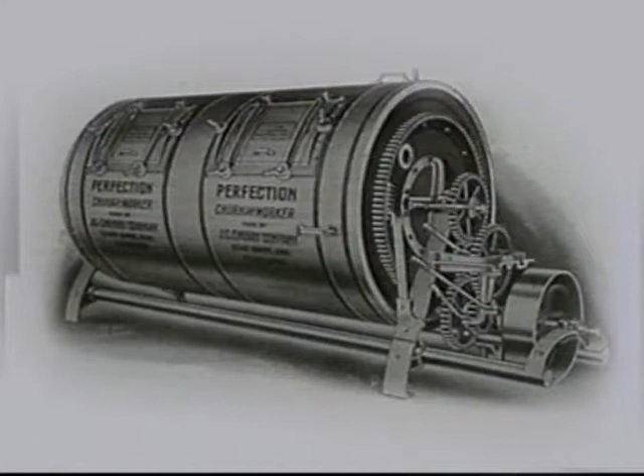Milk, homogenized, pasteurized, packaged, refrigerated, and wholesome. But back in the 1800s, even with ingenious inventions automating the dairy industry, maze-like piping and hard-to-reach surfaces made cleaning and sanitizing difficult. In the early 1900s, dairy products were transported slowly and left outside. There was little protection from contamination and spoilage, especially in summer months when all food spoiled quickly.

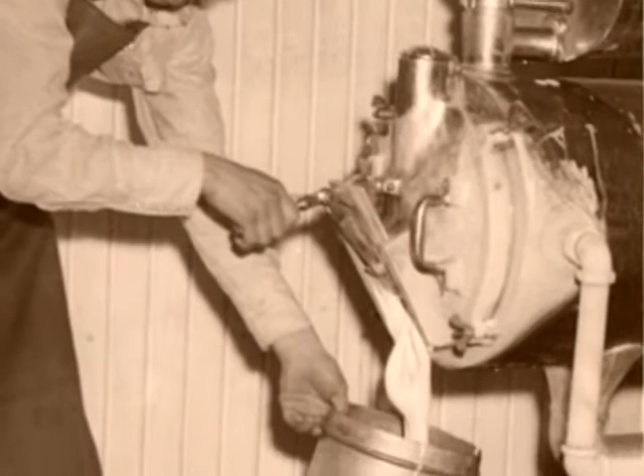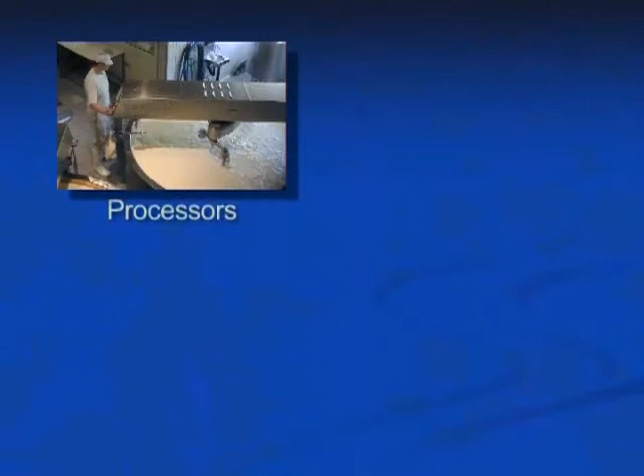The quality of life in America needed more than ingenious inventions, and once again, the dairy industry took the lead with innovations in sanitation. During the 1920s, the forerunners of three present-day associations started to develop more stringent and uniform standards for dairy processing equipment. The discussion included processors, sanitarians, and equipment manufacturers. Together, they published the first industry equipment standards, which became known as the 3A Sanitary Standards, named for the three groups that had combined their efforts to improve equipment design and sanitation.

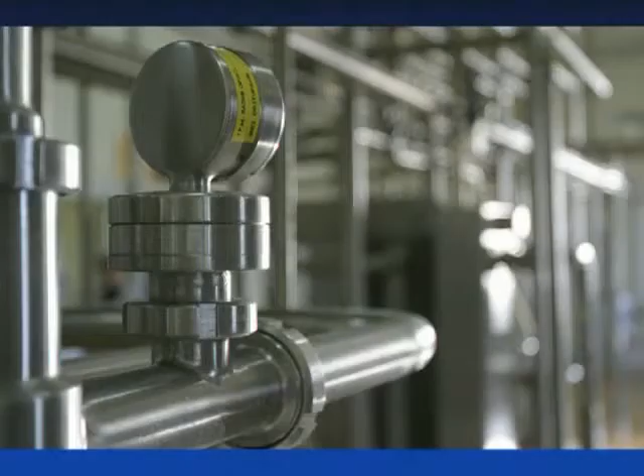In 1944, a dairy industry committee was formed, and the U.S. Public Health Service offered full cooperation with the 3A program. This marked the beginning of a program to provide uniform equipment standards for the protection of public health. And in 1954, the first processing equipment bearing the new 3A symbol was revealed at a dairy industry exhibition. Now, processing equipment could be shown to meet certain material, design, and fabrication standards for cleanability and inspection. The chances of milk being good for you were better than they'd ever been before.

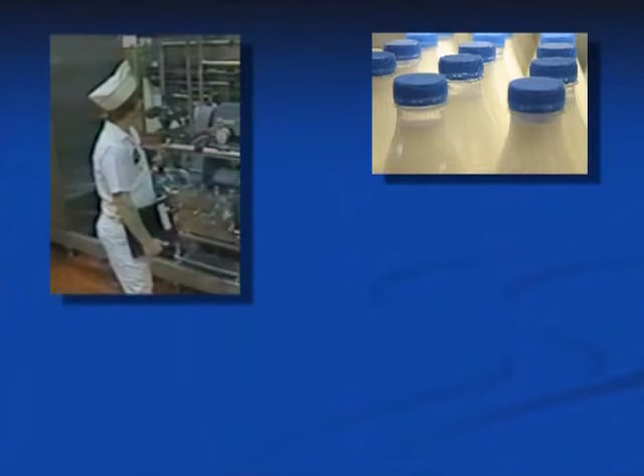In 2002, 3A Sanitary Standards Incorporated was organized. 3ASSI is a not-for-profit corporation governed by representatives of the stakeholder groups: processors of dairy food products, federal, state, local, and industry sanitarians, academic institutions, and equipment manufacturers. 3ASSI today is responsible for overseeing the growing inventory of standards, the 3A symbol licensing program, and much more.

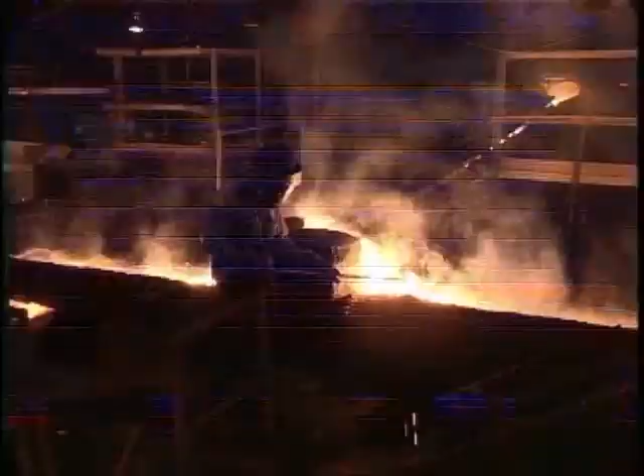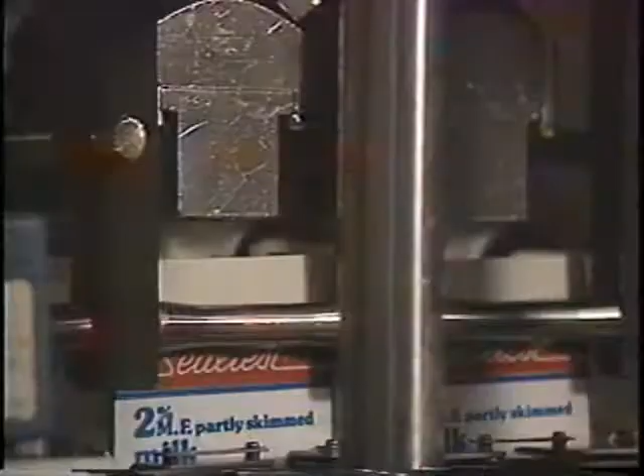Today, there are approximately 80 3A sanitary standards and accepted practices. More than 360 companies from across the U.S. and 22 countries around the world hold authorizations to display the 3A symbol on various types of processing equipment. The 3A sanitary standards combine material, design, and fabrication criteria to assure the cleanability of dairy equipment. The goal is to protect consumable products from contamination and to ensure that all product contact surfaces can be properly cleaned and sanitized.

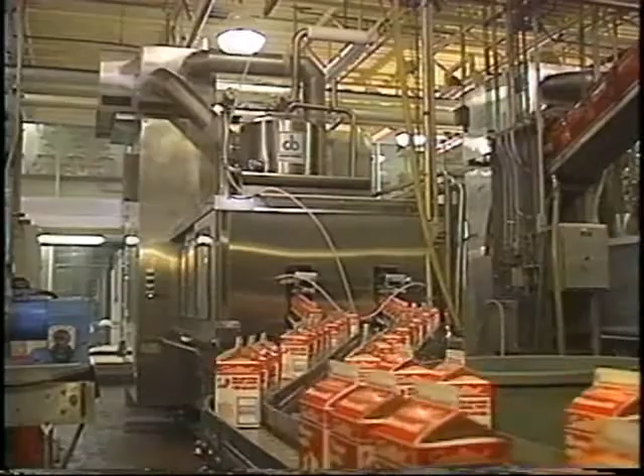Before 3A SSI authorizes display of the 3A symbol, manufacturers must conform to established criteria in the 3A sanitary standard for the equipment. First, equipment must be manufactured from specified corrosion-resistant, non-toxic, non-absorbent materials that can be maintained under its intended use. Contact surfaces must be smooth, non-porous, and free of flaws that could harbor residue and bacteria.

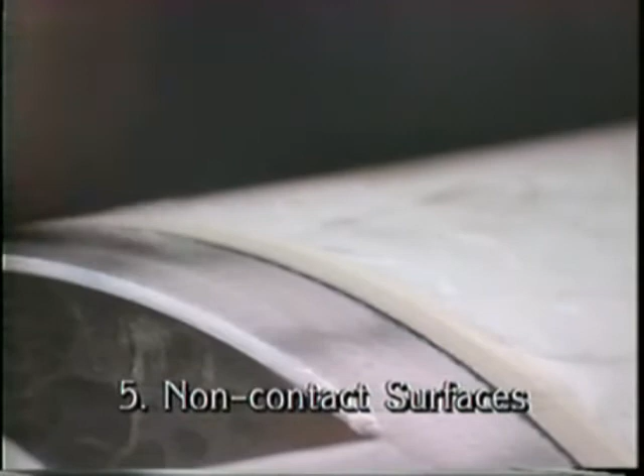Equipment must be designed to be effectively cleaned and sanitized, as well as be accessible for inspection. Equipment must also be designed to protect its contents from external contamination, and all non-product contact surfaces around the equipment must be cleanable. Together, the application of these equipment standards reflects the goal of the 3A Sanitary Standards Program: the protection of public health.

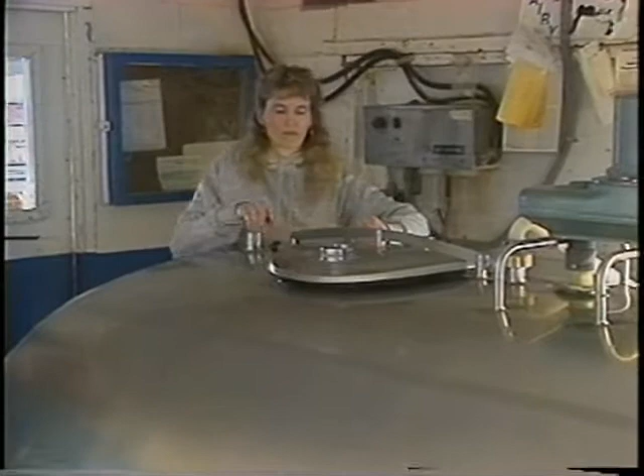On the dairy farm where milk is held in refrigerated storage tanks, the 3A symbol shows that the material and cleanability standards were built into the equipment at the time of its manufacture. On its way to the dairy, milk is transported by stainless steel tanker trucks that meet the same strict standards for materials and cleanability. Once inside the processing plant, milk products flow through equipment that has met yet another set of stringent criteria.

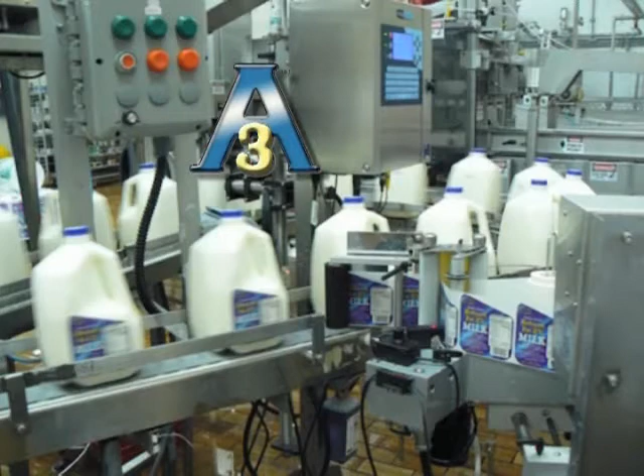These 3A sanitary standards, which apply from the farm to packaging, are formulated and developed through the diligent volunteer collaboration of equipment manufacturers, processors, sanitarians, and regulatory authorities. The 3A symbol assures that the processing equipment has been designed and built to exacting sanitary standards and properly verified. When consumers reach into the dairy case in the supermarket or the refrigerator at home, they have more assurance than ever before that yes, dairy foods are wholesome.

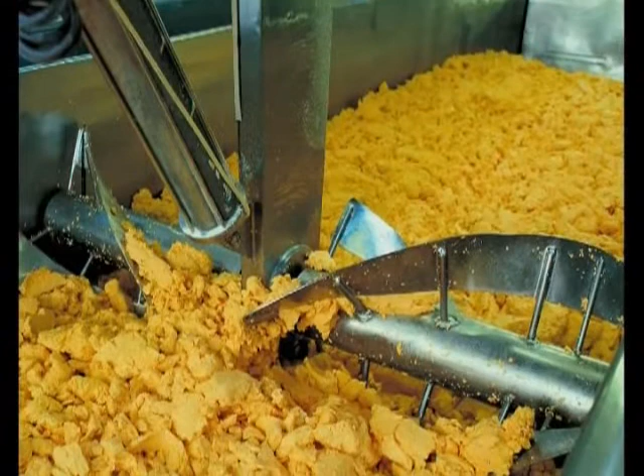The 3A symbol on a piece of processing equipment is far more than just another logo. Over decades of use in the marketplace for food processing equipment, the 3A symbol has earned special stature and recognition, even more so today with independent verification of equipment required for use of the mark.

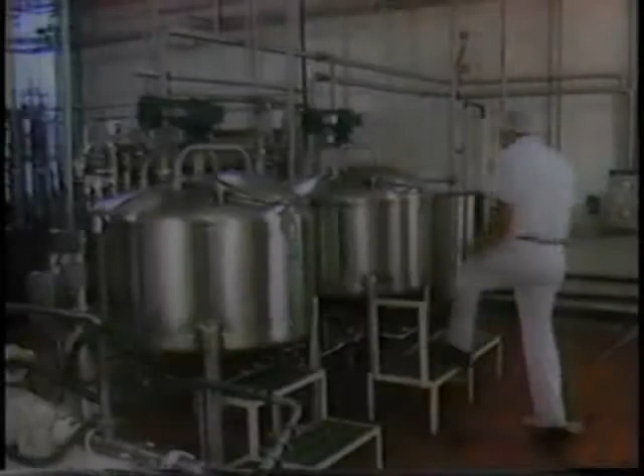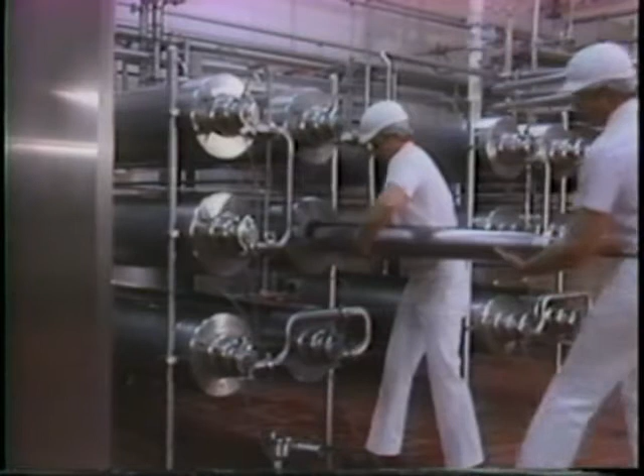Users of dairy processing equipment trust the 3A symbol because it shows that the equipment meets sanitary design criteria approved by regulatory sanitarians and others. They know that the equipment they specify or purchase with the 3A symbol will be easier to clean and maintain, and that the inspection will go more smoothly because equipment conforms to standards that sanitarians help formulate.

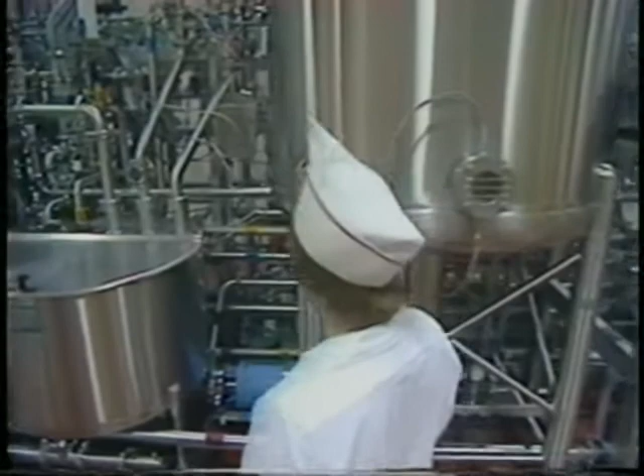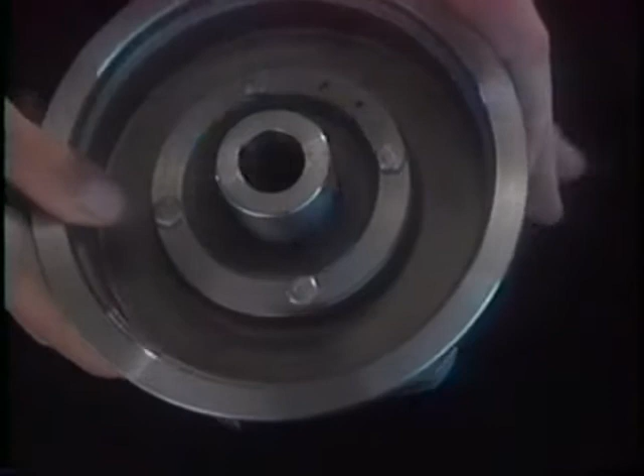Regulatory sanitarians benefit through these guidelines for uniform evaluation and compliance too. The 3A symbol signifies that the equipment is compatible with regulatory requirements and guidelines. They have assurance that the equipment was designed and manufactured to a precise set of standards that embody decades of expert knowledge about sanitary design and inspection from regulatory professionals and others.

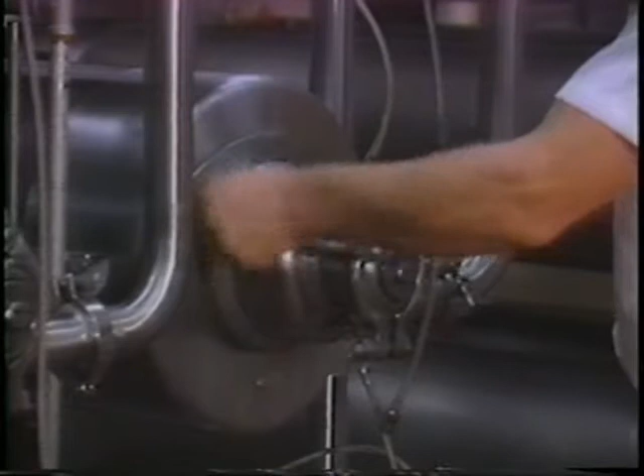Equipment manufacturers gain broad recognition and acceptance of their products across the country because the 3A symbol shows that the equipment conforms to proven sanitary design criteria. The 3A symbol helps streamline the equipment inspection process since it receives approval by virtually all sanitarians and regulatory officials.

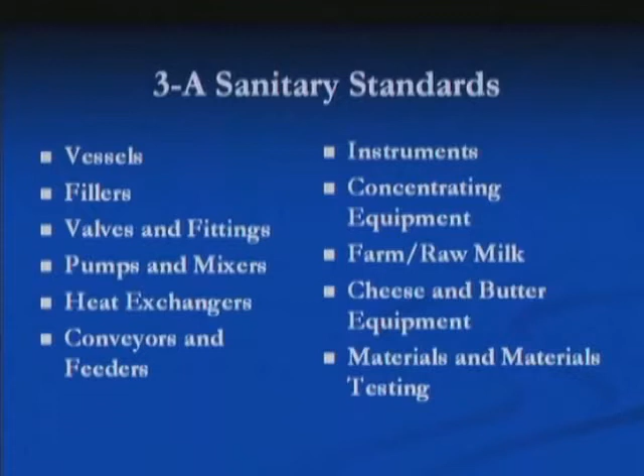Each standard details the sanitary aspects of materials, design, and fabrication, so the equipment will be universally acceptable to processors and sanitarians. And standardization reduces the cost in dies, tools, maintenance, and extended delivery time that would result without uniform criteria.

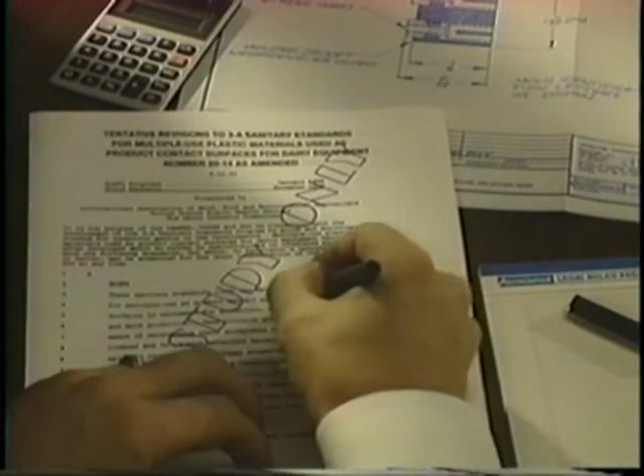3A sanitary standards and accepted practices are being constantly developed, revised, or amended by work groups of subject matter specialists within 3A SSI. First, a group of experienced standards professionals from the stakeholder groups, known as the 3A Steering Committee, determines the need for a new project or a revision. Once approved, the project is assigned to a work group where it goes through a rigorous consensus process involving regulatory sanitarians, processors, and manufacturers.

The 3A sanitary standard or accepted practice must then meet specific majority requirements in the work group before going on to a second level of public review and approval by a designated voting body, balanced by the 3 interest groups.

When a standard has been approved, manufacturers may apply for authorization to use the 3A symbol. To display the 3A symbol, a company must complete an application signed by a responsible company executive affirming that the equipment conforms to the appropriate standard and that the company will observe all provisions of the license agreement for use and display of the 3A symbol.

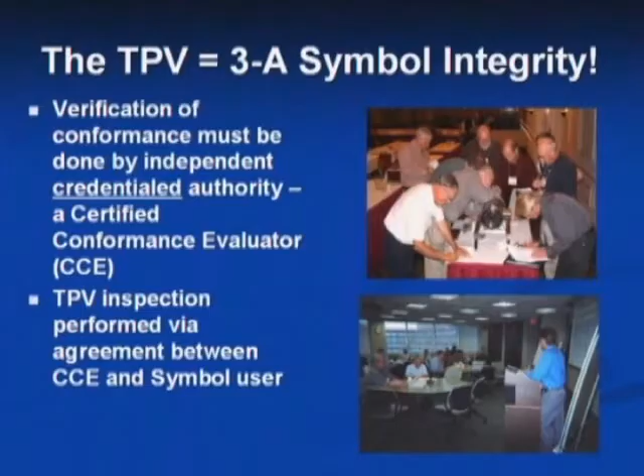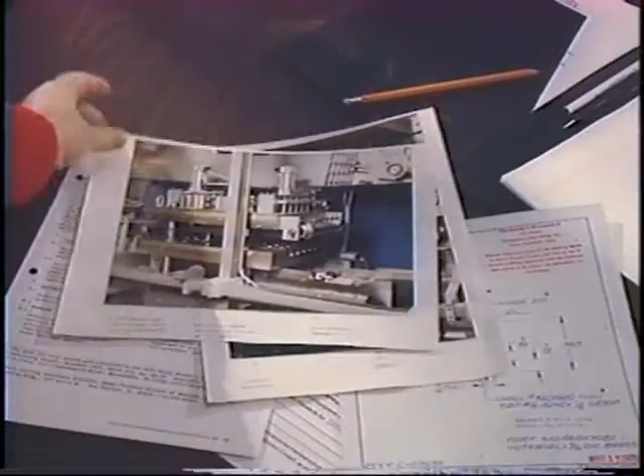The company must engage a qualified independent equipment expert credentialed by 3A SSI, known as a Certified Conformance Evaluator or CCE, who will inspect finished samples of the equipment to be listed on the 3A symbol authorization. The CCE must perform the third-party verification or TPV inspection at the site of manufacture or final assembly of the equipment. The TPV inspection includes a comprehensive review of the finished equipment, equipment design drawings, quality assurance practices, materials certifications, and a sample of the actual display of the 3A symbol.

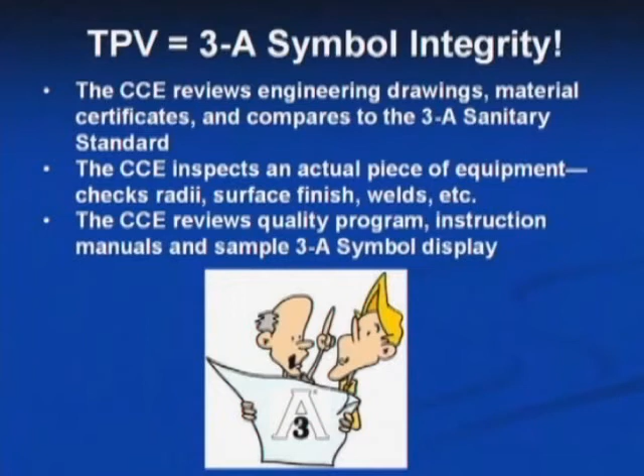When the inspection is completed and conformance is verified, the CCE sends a copy of the report of conformance to 3A SSI. The fabricator sends a copy of the TPV report to 3A SSI with the completed application and payment. 3A SSI reviews the application package, and if it is complete and satisfactory, the manufacturer is authorized to utilize the 3A symbol.

This application process, with the added assurance of the independent TPV inspection, helps all parties trust the equipment that displays the 3A symbol meets strict standards for design, fabrication, and cleanability, establishes for sanitarians reliable guidelines for uniform evaluation and compliance, and provides equipment manufacturers proven criteria for sanitary design and fabrication.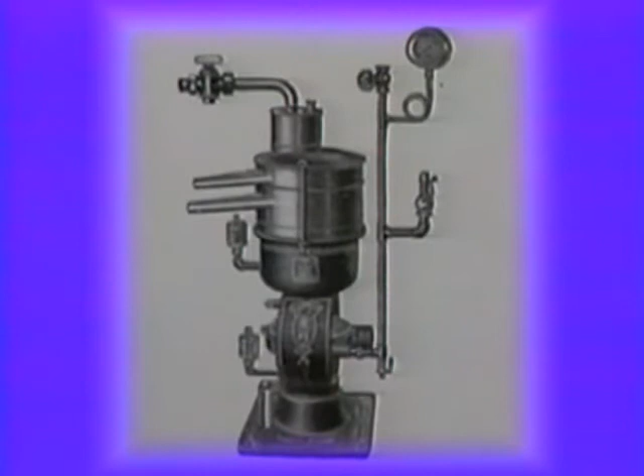The 3A Sanitary Standards Program was a good idea early in the 20th century. It's even a better idea today and will continue to serve the dairy and food industry in the future. By keeping pace with modern technology, the 3A Symbol Program continues to assist processors, sanitarians, and equipment manufacturers. Just as important, the program helps ensure that milk and other dairy products will remain safe and wholesome for all consumers.